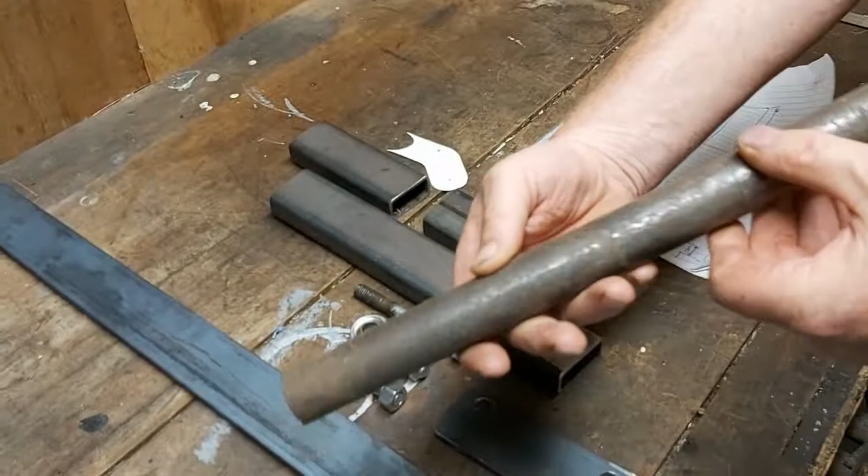If we switch over this way a little bit, this here is the 30mm bar, just standard 30mm bar that we started off with in the last video. We've cut 80mm pieces and drilled a hole through them. So that's the first bit.

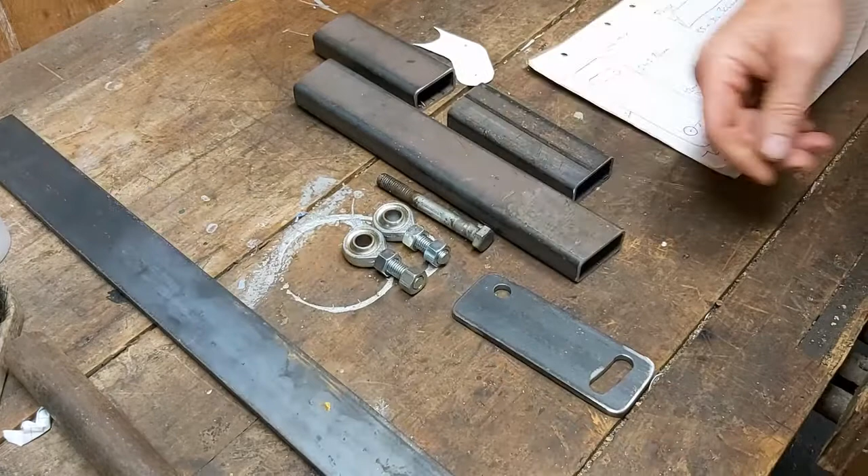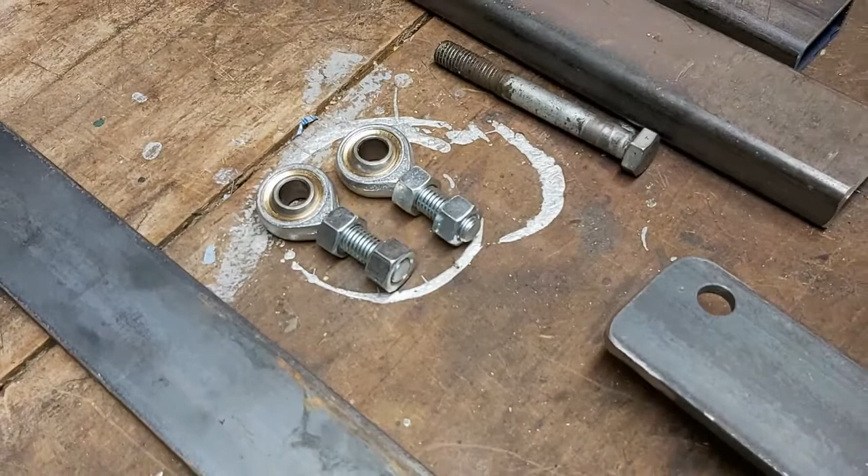The next bit is we've got some 6mm by 50mm flat plate steel, which is what we've made the end pieces for the Heim joints to go into. These Heim joints here are supplied by Motiv Part Supply in Taranaki, good deal on those, so hit them up for those. These will go into the end plates, which will then mount the axle and everything onto it.

The other thing we've got is this steel here, which is 55 by 30 with a 3mm wall. This is what we're going to use for the front axle. There are 3 pieces that go into that, cut at 5-degree angles, so that when we put the whole thing together it will give us our 10-degree angle.

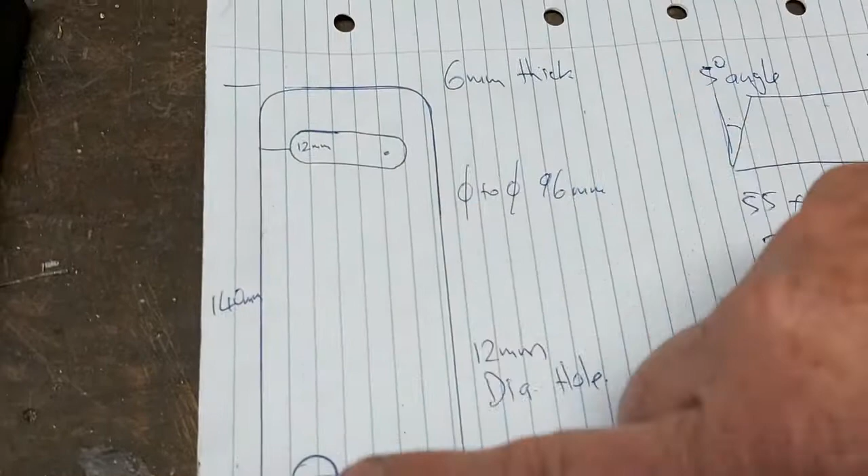If we have a little look at this picture I've drawn here with my best drawing, what we're looking at is the front end itself. We're using a 20mm up, 12mm in, and we've drilled a 12mm hole. Then what we do is get dividers and set it up to 96mm.

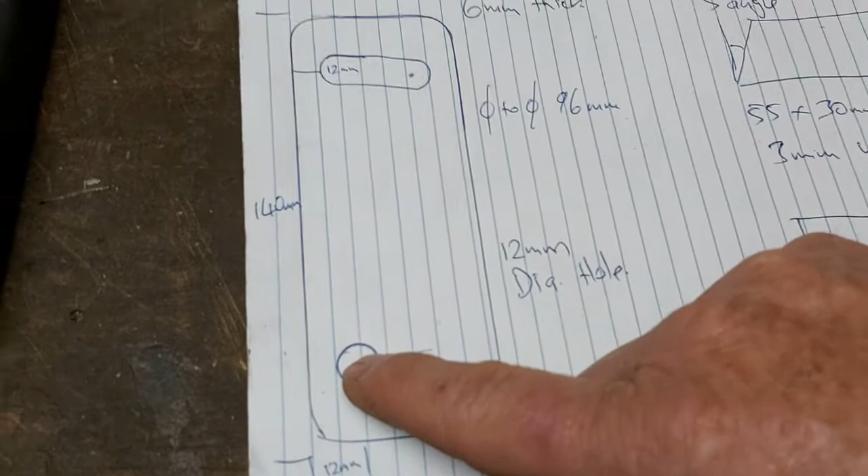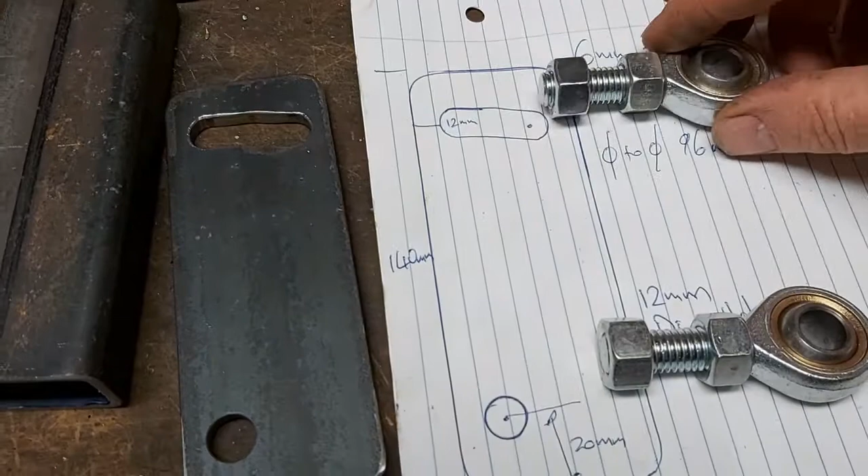The reason we set it to 96mm is because the distance from there to there needs to be the same as the distance between the top of the Heim joint and the 80mm that we've got inside here. So we've got 80mm plus half the distance of each of those, which means that when we bolt it together, the 80mm piece is going to fit nicely inside there. So that's the dimensions for that bit.

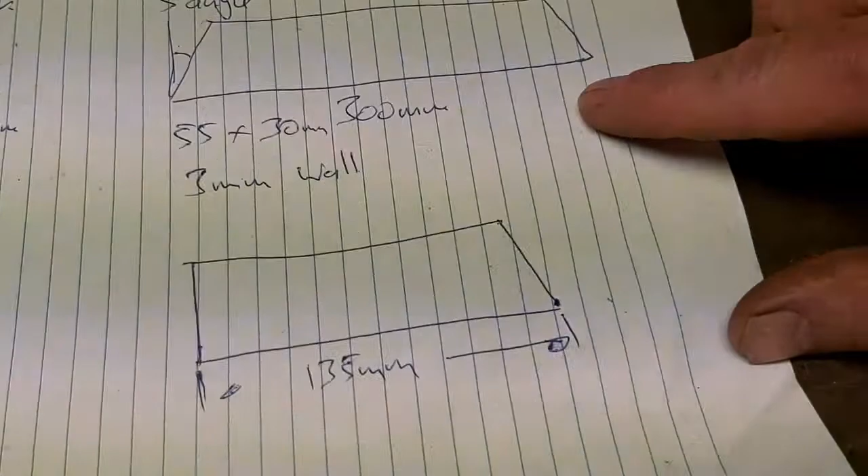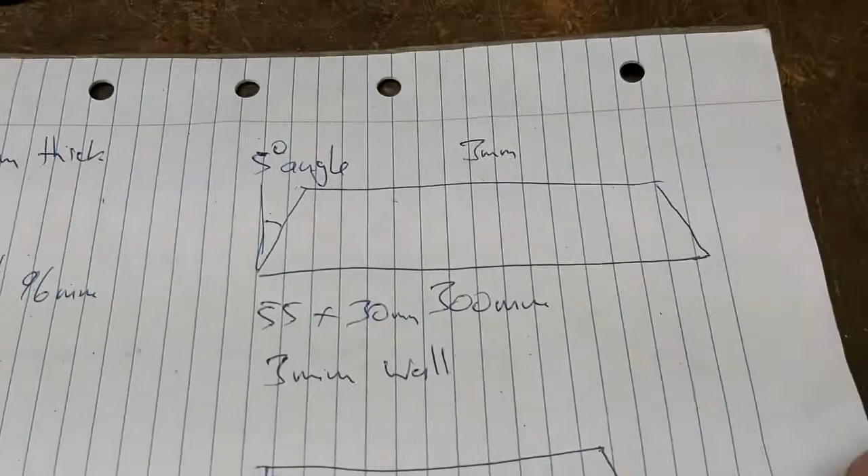Now if we go over to the next side, these are the 2 other pieces I've done with my drawing again. We've got the main piece here, which is 300mm long from outside to outside, again with a 5-degree angle cut on it. Then the other one at the bottom is the short piece, basically 135mm on the outside, with a 5-degree cut on one end and straight on the other.

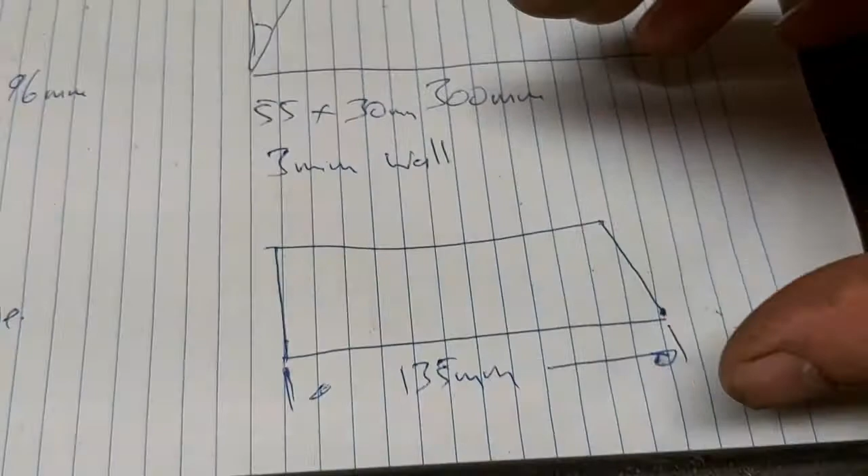Okay, so what I'll do now is show you a little bit here, which will show you how I did those bits.

Okay, so we're currently at a secret location. What I'm doing here is I've machined up these — this is 80mm long with a 12mm hole through it.

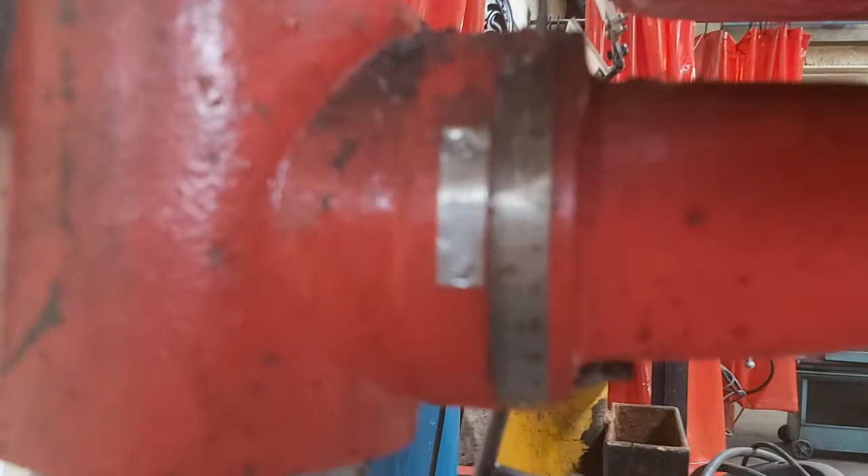Then what we've done is set up the drill press here. We've set it up to, if we look underneath, 10 degrees — we set it to a 10-degree angle, which is the KPI angle we wanted, and then set up the drill press so it's on 10 degrees.

We've checked everything looks pretty square and all pretty good, and now we're going to drill a hole with a pilot drill just to get it started, and then drill a hole through, and I'll show you what that looks like when it's done.

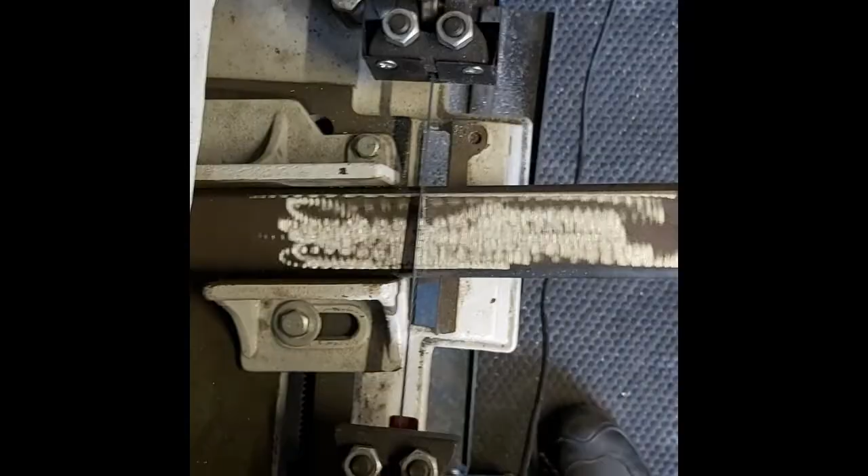Alright, so now you've seen how I've done that. What we'll do now is we'll have a look at the piece that goes on to attach the link rods to. So that's basically this piece here.

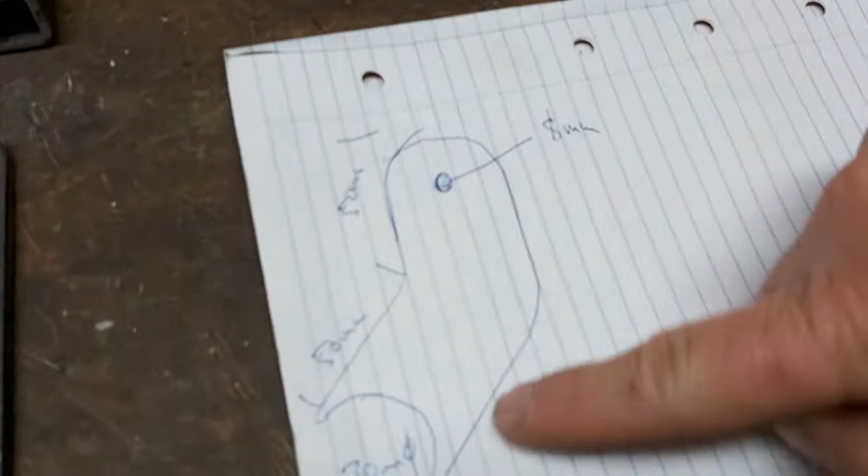Again, this is a piece of 6mm, 50mm wide, and I made a cardboard template, looked a little bit like that, for the 30mm diameter of the axle holder. And then we drilled an 8mm hole in there.

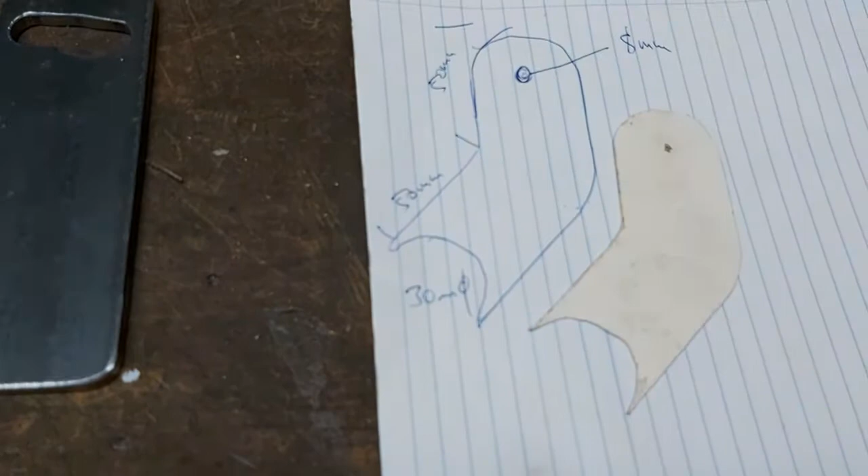The idea is we're going to use the Ackerman, which we've talked about before, which is the line that goes from the centre of the axle through that bolt to the centre of the rear wheel. I can explain that more if you need it. I have shown it in other videos, so you can have a look at those and check those out.

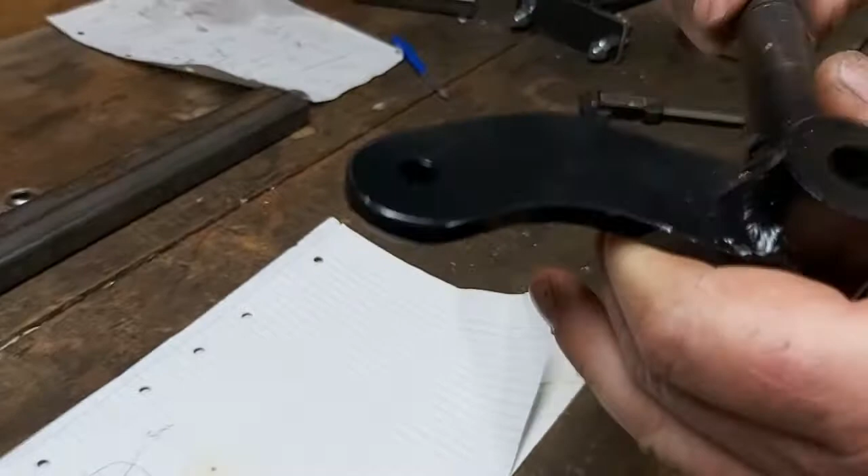So if we start having a look, what we ended up with is this piece here. This piece has got that piece on there, and we've welded it on. We then put the axle in here, and as I showed you, we drilled a hole into here at 10 degrees, and then I put a little gusset in here to make it stronger, and then I've just completely welded it up. So that's now a completed front axle with the attachment on the side of here.

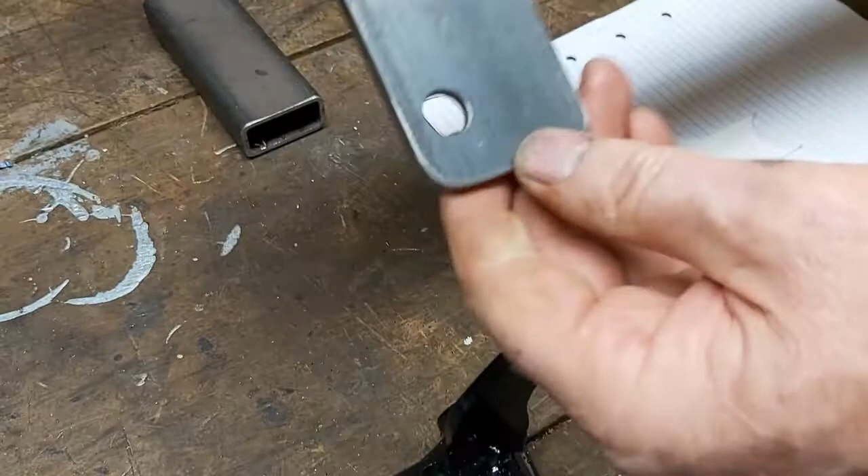So then all we do is we've made this piece, which has got the hole in there, and this gives us the ability to change the caster on the front. So this is the front, and it will lean back to give us more caster.

So all we do is we have these Heim joints here, which are the 12mm ones. We basically just stick them through there. Now we can actually move this in or out if we need to give a camber adjustment if we need to put camber into it.

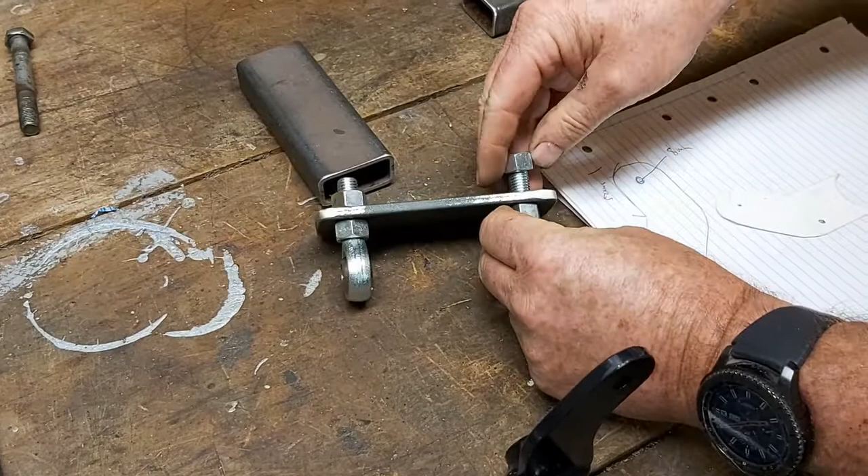I'm not a big fan of camber in the front. My current mower has it because that's how I built the original one, but I don't actually think it helps much at all. So then this is going to be the bottom, this is going to be the top, and it's going to be able to slot backwards.

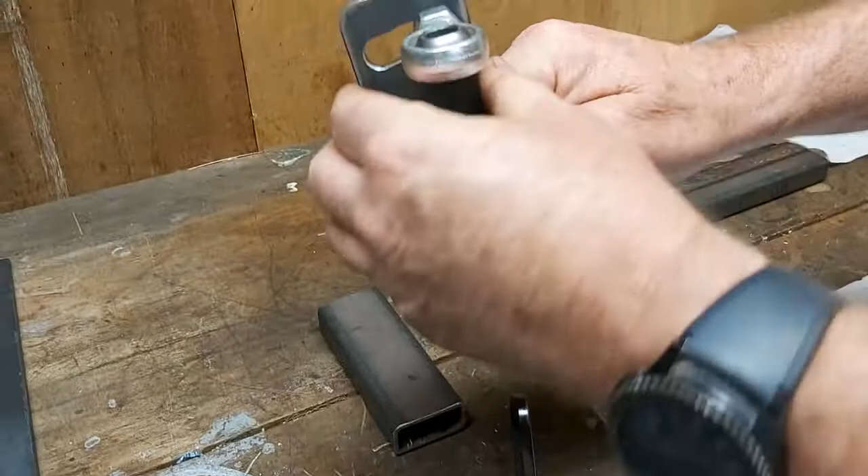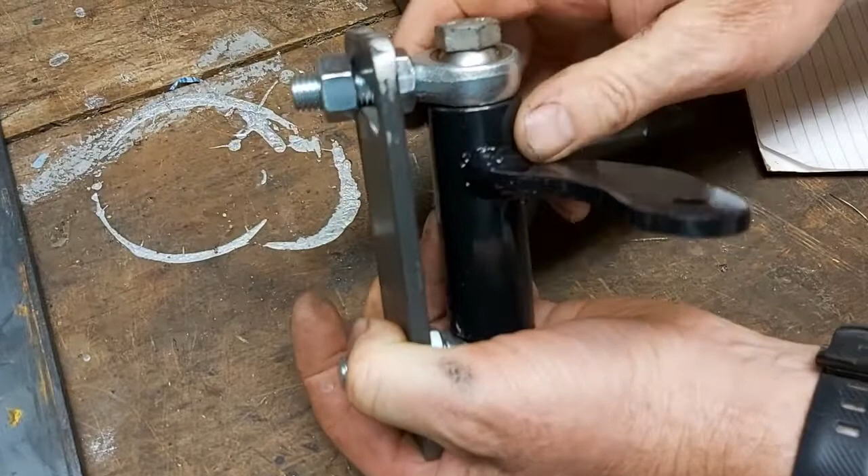So this is the right hand side. Hopefully I've got the right hand one here. No, it's the left hand one. So here's one that I prepared earlier with the bolt that basically just goes through, and then we have the ability to loosen this off and slide it back so we can change that angle of there. What that angle change does is it enables us to get more turn in when we're handling.

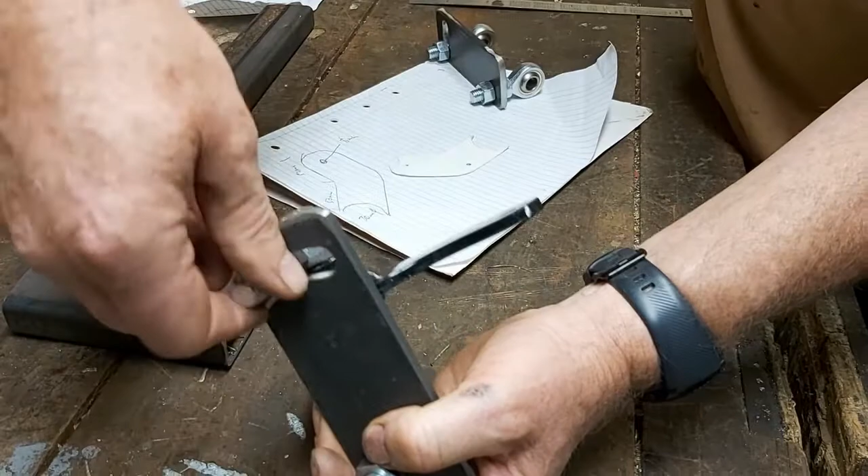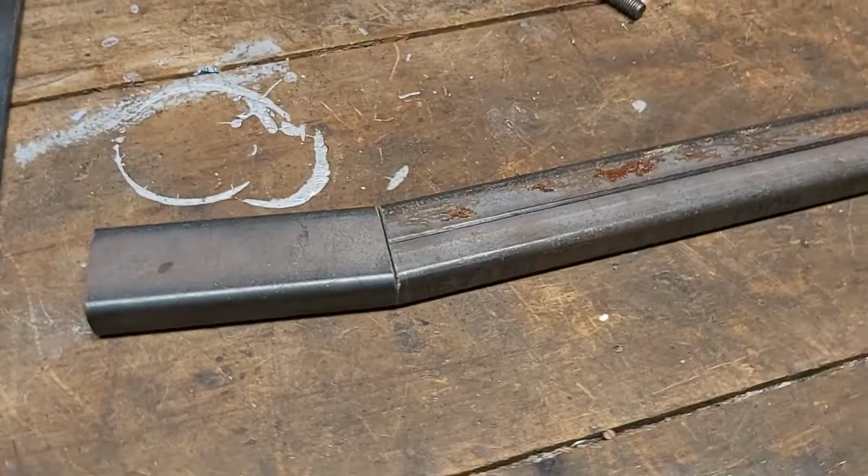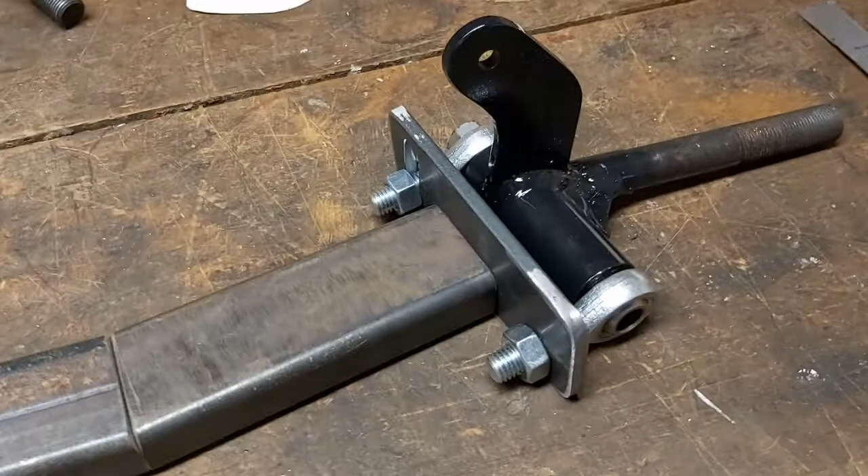So if I lay the whole thing together, we have the centerpiece with a 5-degree angle on each end. We then have the other two pieces which we put together, and we end up with, so the two 5 degrees give us a 10 degree, and then the same at this end, the two 5 degrees give us a 10 degree, and then we have this piece here which we'll weld onto there, and then that will give us our complete actuation for the front end. And obviously the same thing's going to happen with this one at that end.

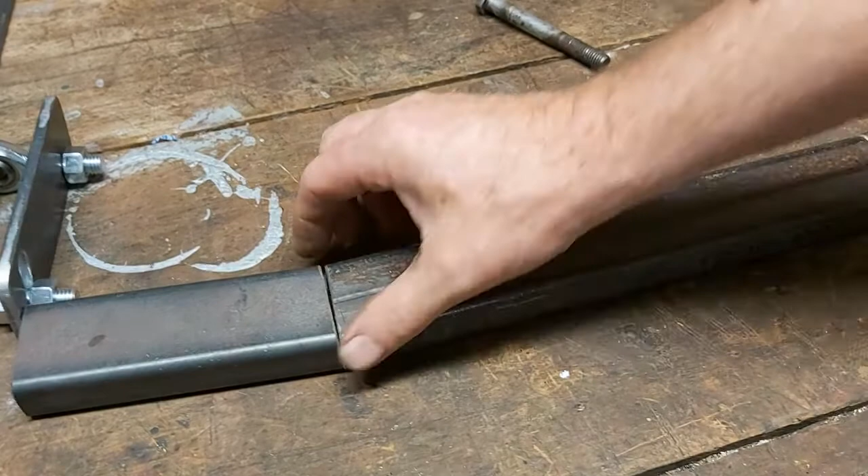Right, so that's what the front end is going to look like. Obviously I've now got to weld that all together and then weld these on as well, so we end up with everything sitting nicely square, straight, and then we can put this whole front end onto the end of the mower. So if you've got any questions about how all that works, then by all means, send us a comment.

I can help you out with what the size of the steels were, where we get it from. Now, a lot of this stuff you should be able to get pretty cheaply from your local scrap merchant. You can either go into your engineering dude and go, hey, have you got any scrap out the back? Approximate sizing is fine. If you can't get exactly the same sizes, fine, get something that's pretty similar to it. And the same with the plates. If you can't get 6mm, you get 5mm, that'll be fine as well. But you do want to use the 12mm Heim joints.